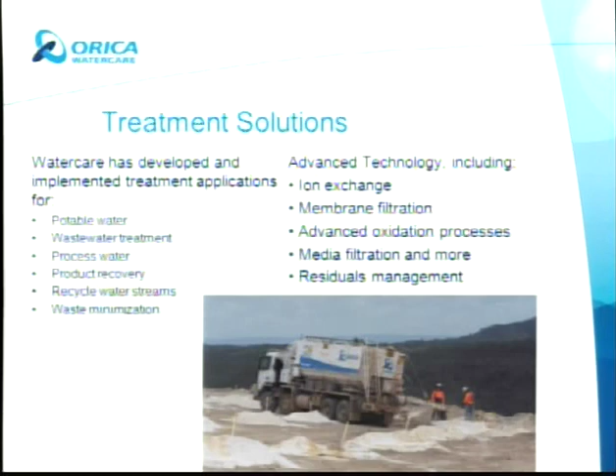We come from a very large mining background that allows us to treat a different type of water every day. So if it's potable, wastewater, process, product, recycle, or just minimizing waste, we have case studies and expertise in it. We use ion exchange, membranes, advanced oxidation, media filtration, and we have a lot of experience in residuals management. So there's a lot of technologies involved in that.

Today we're going to talk about nitrate. In traditional ion exchange that's been mentioned, you can get multiple contaminants. We have certain technologies with our upflow design that we can blend resins. This allows us to do hardness and organics, hardness and nitrate. Maybe we're doing bromide as well. We can really blend a lot of our different resins together to try and meet multiple challenges at the same time.

We also started as an ion exchange company, which has put us in the same boat as everyone else here, there's a brine waste challenge. So we've softened the waste, we've evaporated, and we've concentrated it with nanofiltration. So there's always another option to just squeeze a little more out of that residual.

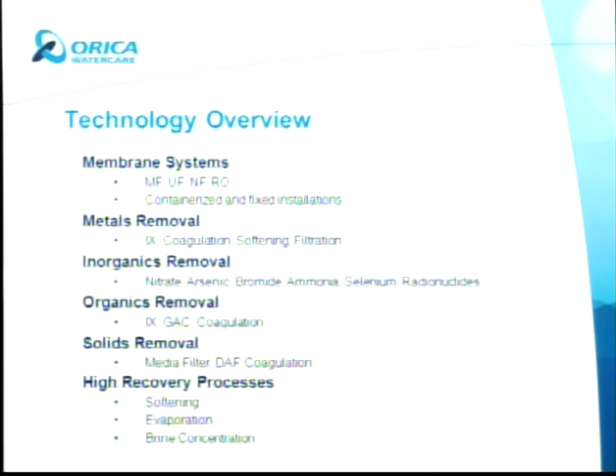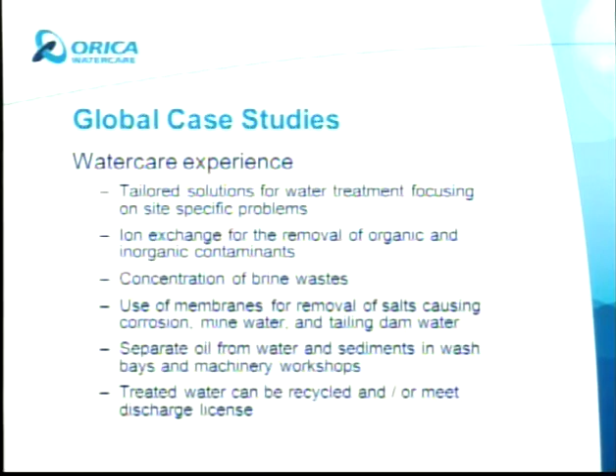We have studies all over the globe, with over 60 installations, and some of the same goals are listed here as we've been going over.

As for ion exchange, we have an advanced ion exchange treatment solution. We remove organic and inorganic contaminants: nitrate, bromide, arsenic, chromium-6, ammonia, lead, hardness, and other metals. We try to minimize our footprint, which helps cut building costs. We're the leaders in process efficiency, and we received two consecutive Green Technology Ribbon Awards at the ACE show from the American Water Works Association.

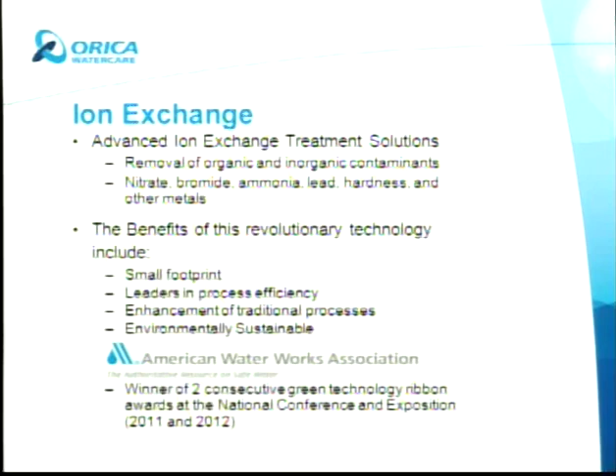Here's a quick slide on nitrate removal using ion exchange. The quaternary amine structure is in the chloride form. You can use other regenerants, but chloride is the cheapest. As the nitrate contacts the bead, the nitrate exchanges with the chloride, and you can reverse the process using a high concentration of chloride or other regenerant.

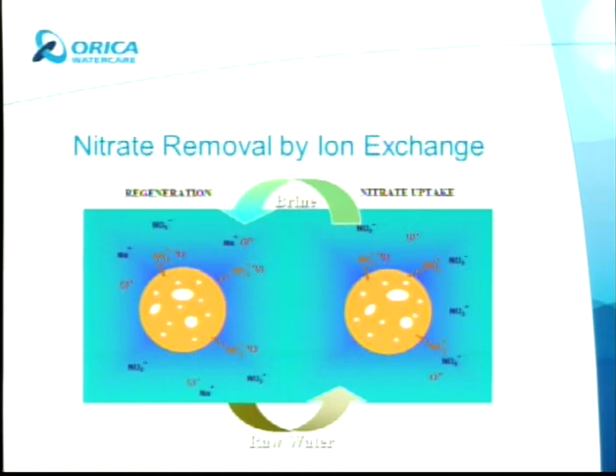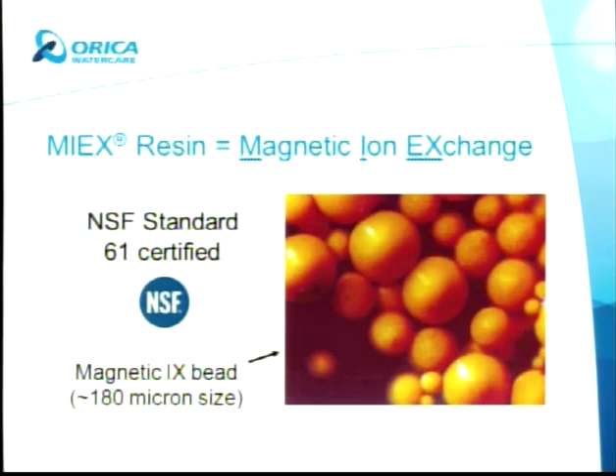Our specific resin is the MIEX resin, which stands for magnetic ion exchange. Our beads are about a fourth or fifth the size of an average conventional bead. This provides more surface area, and usually allows us to do an upflow design in a mixed bed with high surface area and fast kinetics. I'll talk about that more later.

This is the selectivity chart that's been seen in different iterations throughout the day. You can see chromate, organics, and perchlorates are on there, along with arsenate, and nitrate is what we're talking about today.

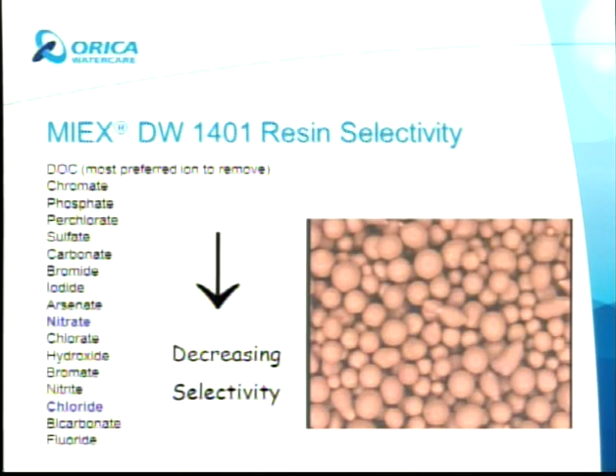The MIEX high rate process is an upflow process. The water comes in the bottom, and there is agitation or a distributor for mixing energy. This keeps the resin in suspension. There's a separation zone, and then the treated water goes out the top of the vessel. This can be pressurized or atmospheric. We have a lot of experience in surface waters where turbidity is a factor.

There's a slipstream regeneration, as Chad mentioned earlier. A fraction of the resin, maybe up to 5%, goes out into a separate process vessel where brine is contacted with the resin. The contaminants come off, and it's back in the chloride form or whatever regenerant you use. Then it's rinsed, and we can have as low as 0.1 to 0.3% outputs in terms of waste.

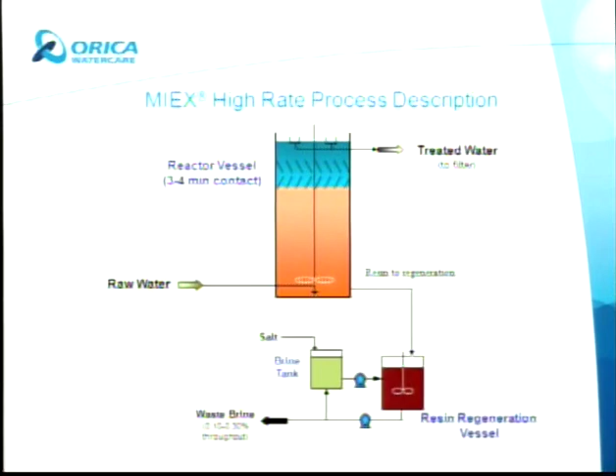The countercurrent MIEX process is one of the solutions I'll show you today. It uses two vessels, both upflow. In the case study, it's two pressurized vessels. It's almost like a lead-lag design, except your lag is in front. So the resin moves from the right side to the left side, where the cleanest resin comes in at the right, and then it's partially exhausted and moved into the vessel on the left.

That allows you to grab the easiest contaminants, such as sulfates and organics, on the partially loaded resin in the first chamber. When you have really clean resin in the second chamber, there's pretty much only nitrates and harder-to-remove anions in there, with the most capacity in the resin. So the idea is you get a higher efficiency of removal of hard-to-get contaminants.

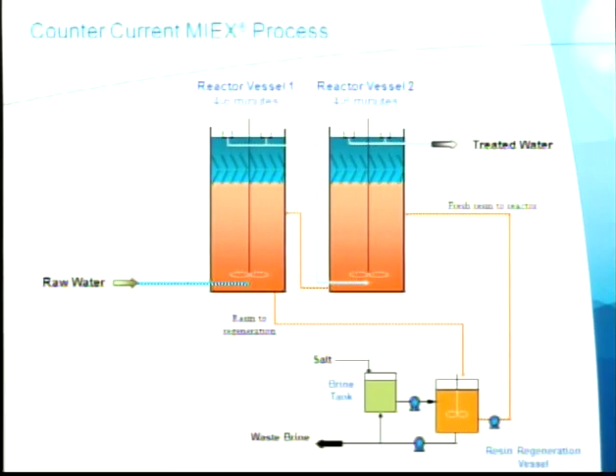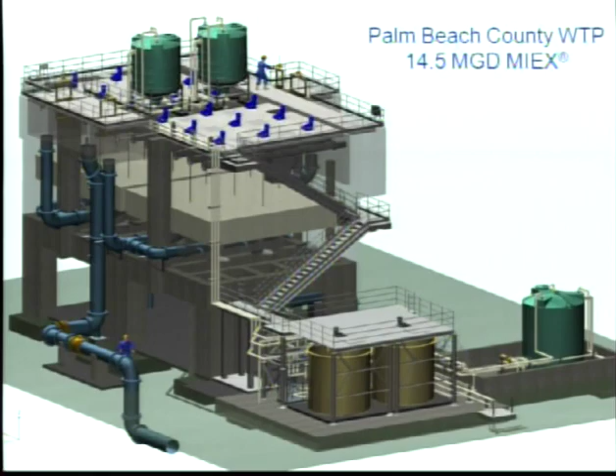Now we'll get to the smaller scale. The advantages of fluidized bed ion exchange are that there's no blending requirements, and you don't need online analyzers. We have a system that works on field instrumentation only, which ends up with no nitrate dumping or any other contaminant dumping, and you can apply it to higher turbidity situations.

The way we control it is by controlling the regeneration slipstream as the nitrate load increases due to seasonal or partial use situations. We can increase the amount of salt and resin processed to increase the capacity on the resin for when the nitrate does start to spike on the raw water.

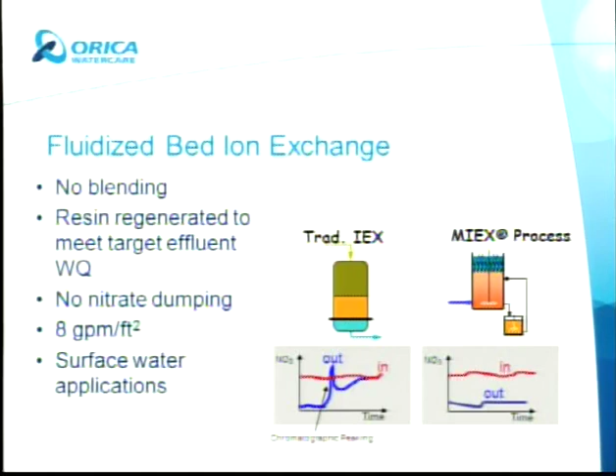This is the first case study: Indian Hills Water District, on the outskirts of Denver in a small rural community with a history of farming. There's about 1,100 people there, and they average 45,000 gallons a day.

This is a surface and groundwater distribution system. The surface water has been in short supply due to droughts in Colorado, and they supplement their water with groundwater. So they're in violation if they use that solely, but they try to blend to get into compliance.

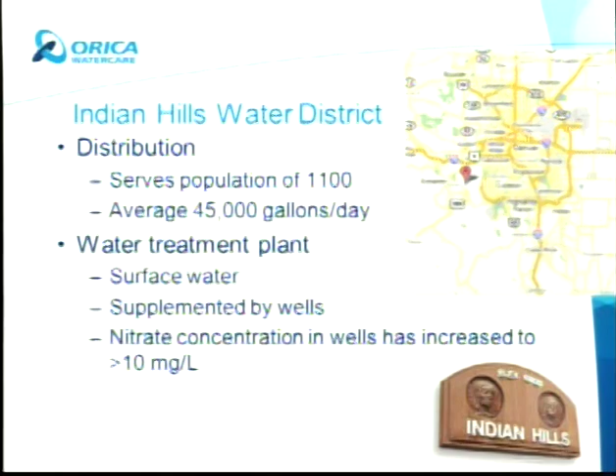This also lines up with our challenge of doing a 50 GPM system and costing it, so keep that in mind as I go through it. Their challenge to us was 50 GPM of flow. This actually has a turndown to about 5 gallons per minute, so you can go 5 to 50 and reduce the nitrates by 50%.

This does not have a wastewater treatment facility. All waste is tanked off, but as you can see, it's relatively close to Denver, so it's easy to find a place to put it in a wastewater plant. So we came in with our countercurrent upflow design.

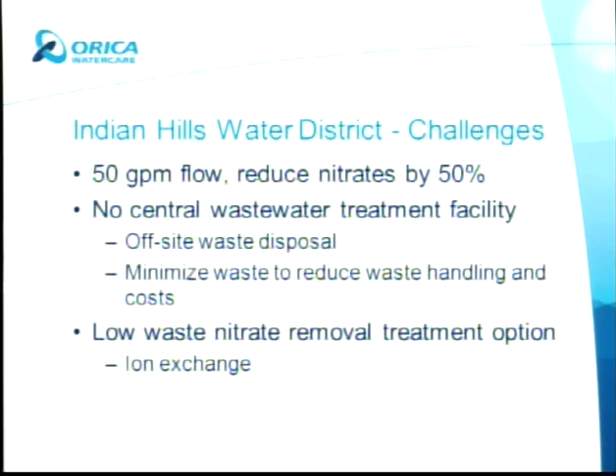The treated water quality: the raw influent average is 12 to 16, about 14, which is about 60 ppm as nitrate, and then the treated average is 5.4, closer to about 25 as nitrate. We also have other anions, the DOC, that's a potential for disinfection byproduct issues with your chlorinated fractions of disinfection byproducts, the chloroform and THMs, particularly in that case.

We do remove sulfate, and this is a relatively high hardness water, which our resin is pretty resilient against scaling, so we don't have to soften the brine, which adds to the efficiency.

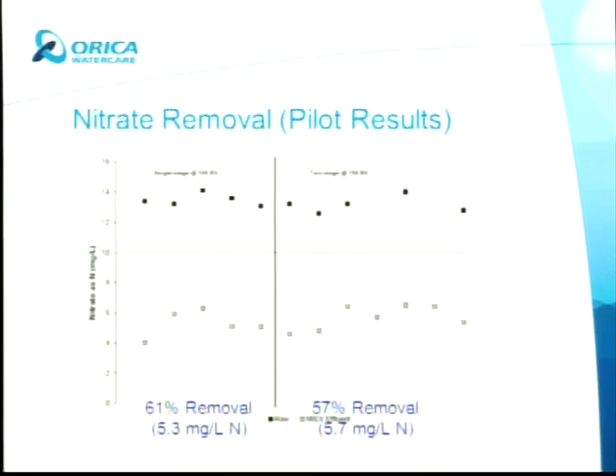We also tried to demonstrate that if we spiked the water and put the nitrate as a nitrogen concentration up to 25, we were able to increase the regen rate and keep the controlled effluent in their target, about 5 to 6 on average there.

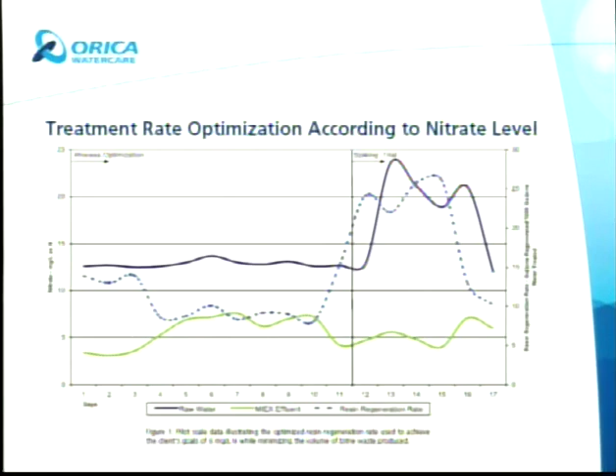The system has a minimal footprint. The client is looking to put in an online nitrate analyzer just for monitoring purposes. The system runs on a field colorimeter. It's a Hach test and tube kit, and the operators test it once a day.

It's two guys: one guy's the fireman, the other one is the wastewater distribution and drinking water guy. There's a 2,000 gallon storage tank, and we're using about 3,000 pounds per million gallons output.

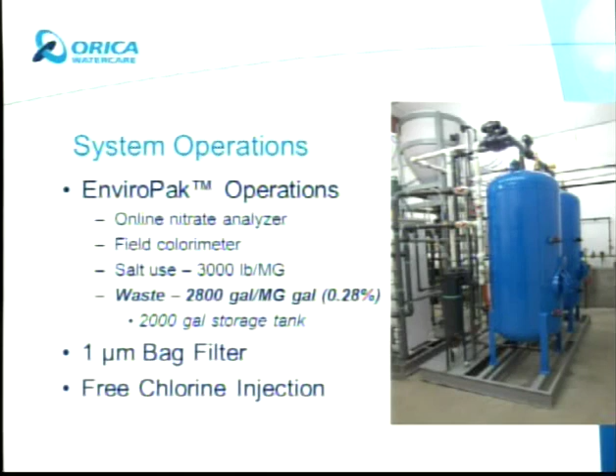There's no large salt handling. This is a mountainous area, so they use bags of salt, and the system was designed for that. We also have 2,800 gallons per million gallons of waste, which puts us at 0.28%. To finish off the system, there's a 1 micron bag filter and then free chlorine.

This cost about $150,000. This was in 2008, I believe. The resin cost, as an ongoing basis, you probably have to replace it every 3 to 5 years. Salt's relatively cheap in the area, so $100 a ton.

And then there's minimal power, about 2 to 3 kilowatt hours, probably just to keep the lights on and keep the PLC going. This is a basic system: painted carbon steel vessels, FRP, HDPE process tanks, no online instrumentation, and 100% redundancy.

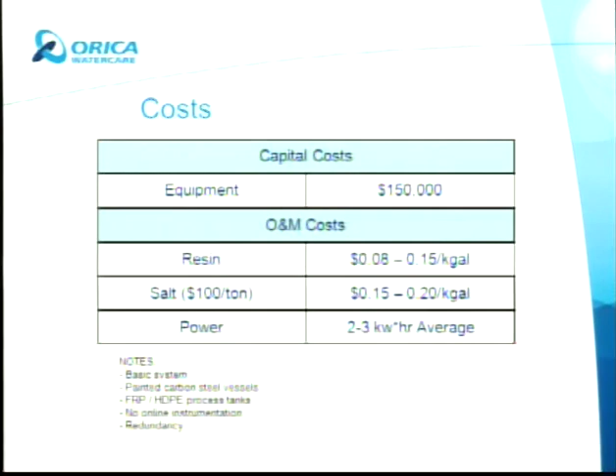So to keep that reliable system, we have a PLC. We had to do 100% redundancy for the state. It can run on one contactor or both to get extra nitrate removal, and then there's 2 regeneration tanks.

Our second case study is the County of Brant in Ontario, halfway between Buffalo and Toronto. This was a bid that we replied to, about a 792 GPM system in total. Associated Engineering was the lead, and it was a groundwater system, and they spec'd nitrate-specific resin with automatic blending, including Nitratax Hach analyzers. They do have sewer there.

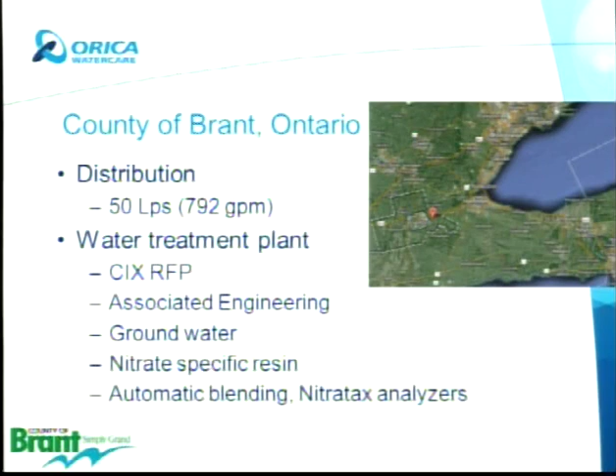The 50 liter per second distribution was set up with 3 20-liter-per-second contactors and a 10 liter per second bypass that could go up to 50 liters per second.

They had a requirement of 24 hours before a vessel would regenerate, and they also gave us the 20 mg/L nitrate loading for the capacity design. We had to blend to an effluent nitrate of 3 as N, or close to 15 as nitrate, and then we could not exceed 3.5 as N.

We did have a process warranty on there for a year, and we also had a warranty where if it did alarm, we'd have to show up. So we haven't shown up yet.

We went in with an alternate bid of the split flow countercurrent regeneration design. I'll go over that in a minute here.

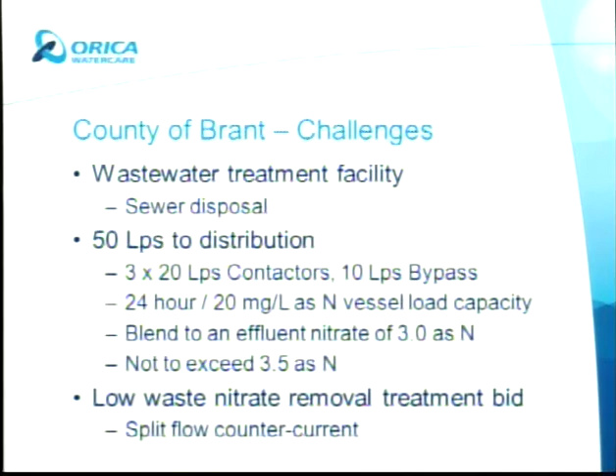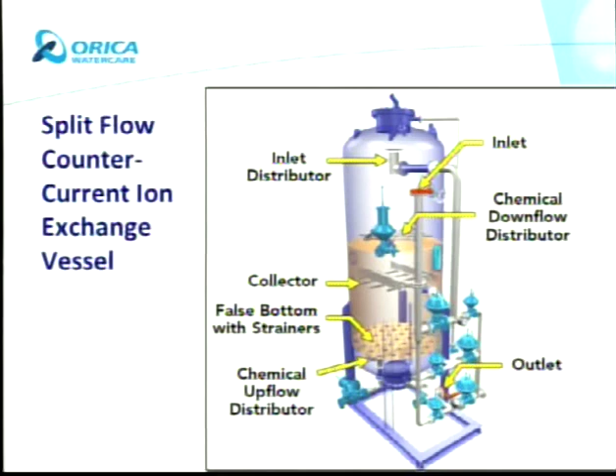So it's still a top-down conventional ion exchange system, fixed bed. You go in the top, come out the bottom, and as we alluded to earlier, the nitrate really loads on the top. So the way this is done is we reuse the brine and regenerate the top third of the media. You can go through multiple cycles before you have to regenerate the entire bed. That allows for waste and salt savings.

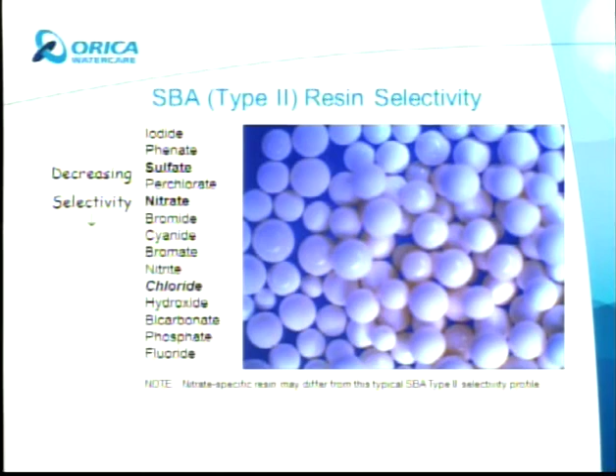A strong base anion type 2 resin selectivity with nitrate specifics kind of rotates the selectivity chart a little bit, but it pushes nitrate and sulfate a little closer together.

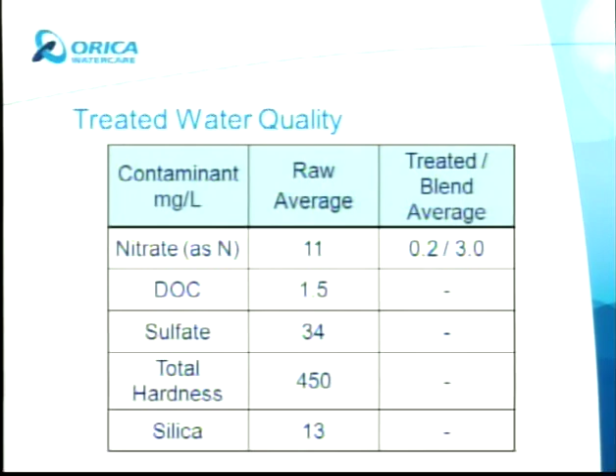We don't have a lot of water quality data on this, but the nitrate is continuously monitored. It comes in at 11, and out of the vessel it's 0.2, and with the blend it's 3. There's a little bit of DOC and sulfate, and the hardness and silica is very high, almost in the fouling range. So we've been able to not have any issues on that. And then there is softening on the brine preparation.

So this system has 5 online HACH Nitratax analyzers. That adds a lot of cost. Each vessel has its own analyzer, the bypass has an analyzer, and the blended stream has an analyzer.

We're able to get the salt use down to 900 pounds per million gallons, and the waste to 3,200 gallons per million gallons, 0.32%, using pretty much conventional ion exchange.

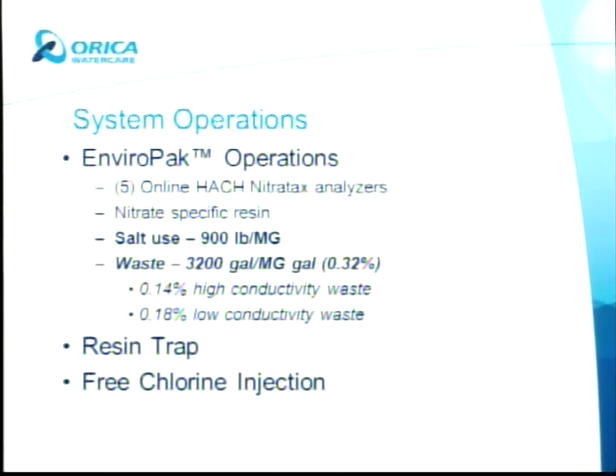Of that breakdown of the waste, 0.14% is high conductivity, where the majority of the nitrate is. And then 0.18% is the low conductivity waste, your backwash water and fast rinse. There's a resin trap and then free chlorine to complete the system.

This one came in high just because of all the site requirements. We had to use specialized valving, specialized instrumentation, nitrate-specific resin when it didn't really call for it. However, you did get some operational benefits on that.

We had to do stainless steel face piping, and it was in a remote area, so your salt price is well over 100 per ton, as it is in Colorado. It's 225 a ton. We estimate that the resin will last 7 to 15 years.

The resin is probably twice as expensive as conventional strong base anion resin. The nitrate-specific doubles the price. It's just not used in large enough volumes for the economies of scale.

And then almost no power is used for our portion of the system. The well power is probably the majority of the power for the system. So this is pretty much just keeping the lights on and running a 2 horsepower pump for 30 minutes once a day.

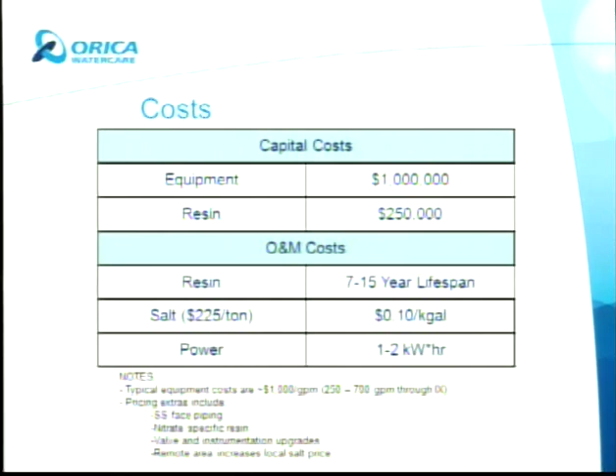We did have a little reliability issue. This is a 3 by 50% system, essentially 2 vessels on and 1 in regeneration or standby. The automatic blending is achieved through the nitrate PID loops.

This does have remote monitoring. We can go on our laptops or our iPhones and control the system, and it's been very helpful for the first few months as you're trying to train operators and get them accustomed to a new system besides just chlorine. You can walk them through it.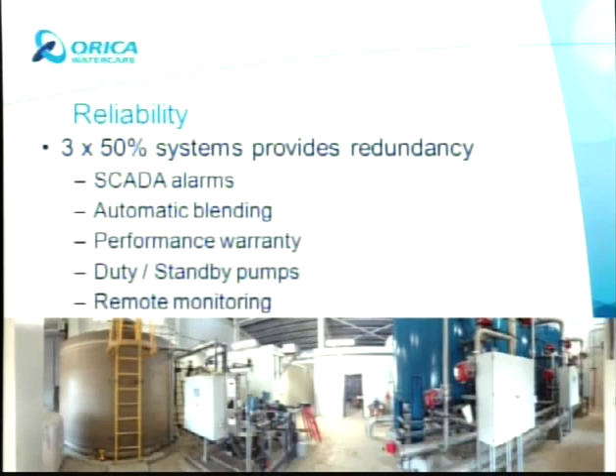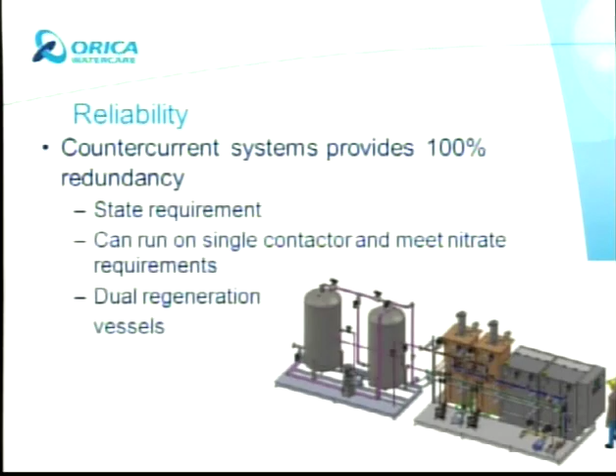On the other system, to keep a fluidized bed we have a recirculation pump that takes the effluent and puts it back through the bottom to maintain resin suspension. For a 50 GPM system, that can probably be handled by a 1 to 2 horsepower pump. Depending on influent flow—if we have full flow we don't need the pump, if we have zero flow we need it at full speed—so you're using a percentage of that. That's your major horsepower draw on a fluidized system, probably averaging half the percentage, so a 2 horsepower pump averages about 1 horsepower. In this case it's a 5 horsepower pump since it handles both vessels, so you'd add 2.5 horsepower plus about 1 kilowatt hour on average for controls.

Any other questions? Any on the web? Nope. I thank you. Thanks.

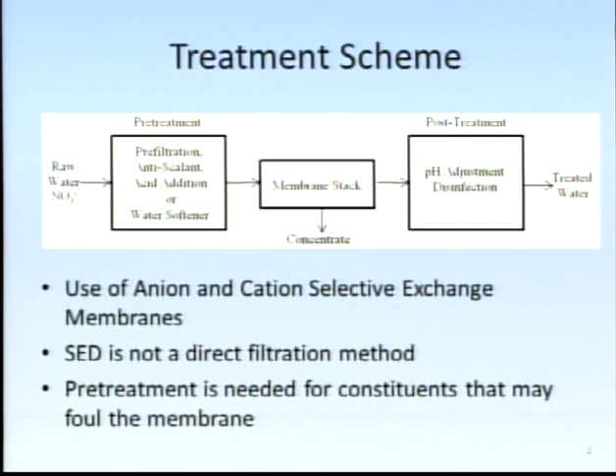Here's a basic schematic of what electrodialysis looks like, for the membrane rack. These pictures are available in the UC Davis technology report. Here in the middle is the concentrated stream, where the reject water will go, and here is the raw water just passing through. On the two ends of these stacked membranes, there's a cathode and anode on the left and right side of the picture.

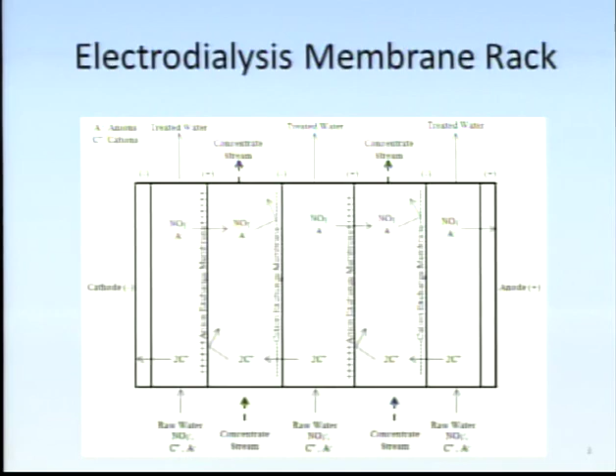I'm going to switch over to the cartoon, which explains this process really well. The blue channel, where you have the little ping pong balls going through, that's your raw water stream. You have all your contaminants of different kinds - nitrate, calcium, chloride, sodium, and so on. The membrane here is nitrate selective. So by turning on the technology...

You see that the ions, positive and negative, start getting attracted to the side of the membranes. The nitrate, which is the gray ball, majority of them will get into the reject channel, whereas the majority of the other ions just pass right through in the main channel. So this is one way for us to concentrate nitrate and have a reject stream that is mostly nitrate and does not have very high TDS, because the majority of the water just passes right through.

The potential treatment benefits for this: the treatment objective is to maximize water recovery with the minimum amount of energy and chemical usage, as with any technology we're trying to implement. In this case, there's potential because you have lower pumping cost compared to reverse osmosis.

That's a benefit. The selective electrodialysis process just removes the nitrate, so the TDS remains in the treated water. And since the TDS is not concentrated, the TDS concentration in the concentrate stream is so much lower, there's potential for you to use that concentrated stream somehow. One possible way is the concentrate can potentially be used for irrigation without the salinity that adversely affects plant growth that you have with RO. So this is a good potential for SED.

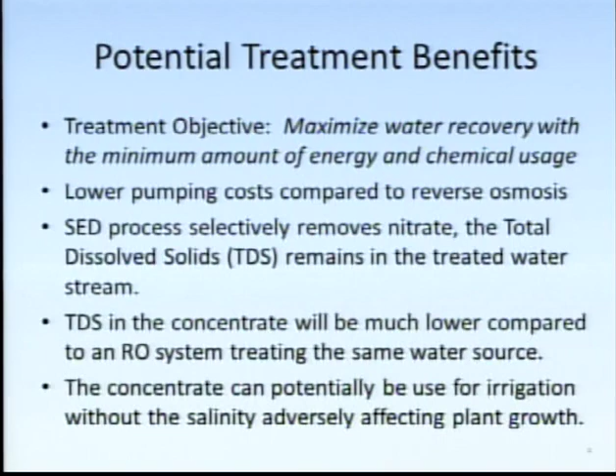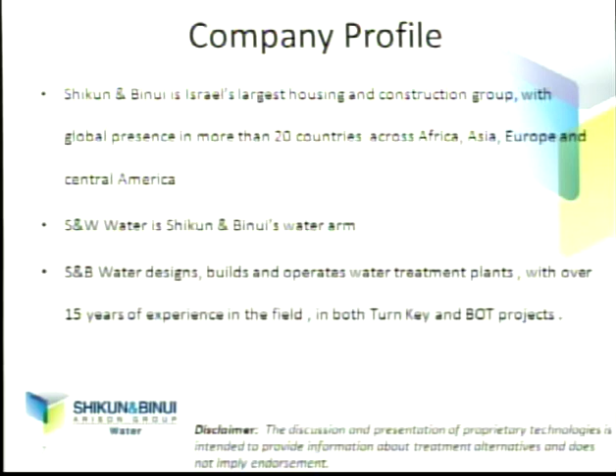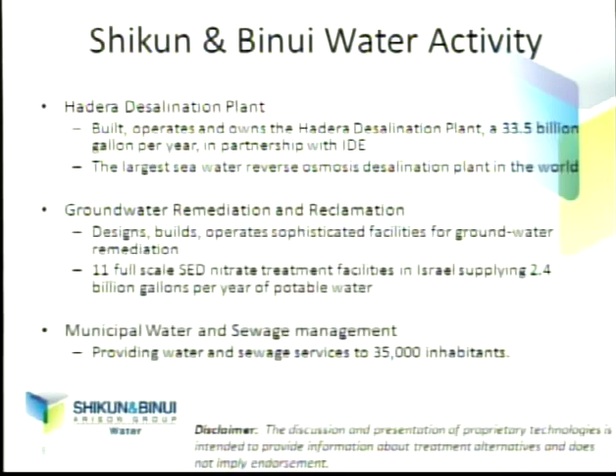The company, the product is Shikun and Binui. They are a company based in Israel. They have these products, a couple of them in use in Israel already, where they have a big nitrate problem as well. Their company is one of Israel's largest housing engineering construction groups. S&B Water is their water arm, and they build and design water plants in Israel. They have a couple plants - the Hadera desalination plant is one of them. They have a groundwater remediation and reclamation plant, and they also have municipal water and sewage services.

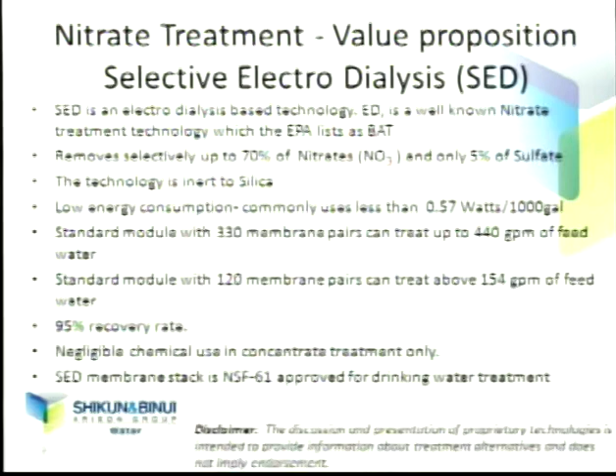So same as the diagram shown earlier, the cation exchange and selective anion exchange membranes are arranged alternately between the electrode cells. So you have the main channels, and then you have the reject channels in between.

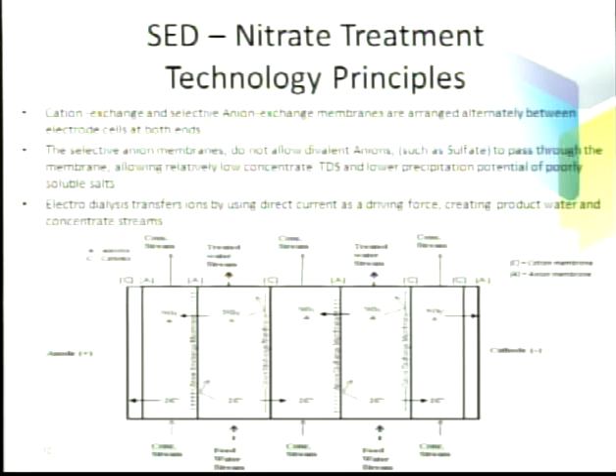The selective anion membranes do not allow divalent anions, such as sulfate, to pass through the membrane, allowing relatively low concentrate TDS and low precipitation potential of poorly soluble salts. The electrodialysis transfers ions by using direct current as driving force, creating product water and concentrate streams.

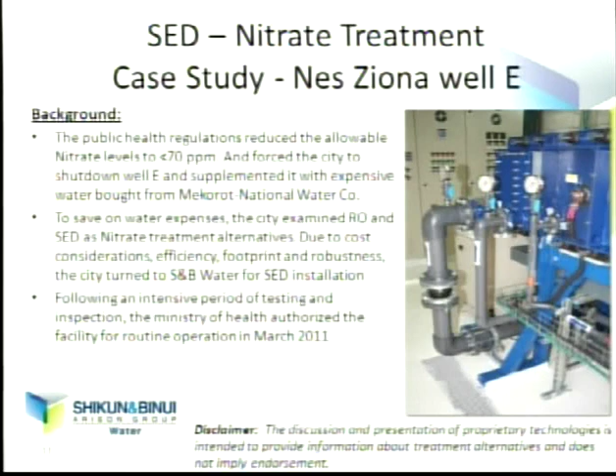Here's some case studies that they have provided us. The SED nitrate treatment plant at the Nes Ziona well E. The drinking water standard for nitrate in Israel is 70 ppm as nitrate, so it's much higher than ours. To save the water expenses, the city examined RO and SED as the nitrate treatment alternatives, and for their cost they found SED to be cheaper. So they did quite a bit of study, and then they actually installed the treatment plant, and it came into operation in 2011. Here are some examples and results of what they can do.

As you can see, the raw water coming in from this well is around 90, and then the effluent they can consistently meet around 40 to 50, but that's based on a standard of 70.

They have been working with us here in the States because they're proposing to try to enter our market, and they're working with one of the larger water utilities in California. They have done some baseline pilot studies in a laboratory environment, and they're able to mimic the same performance here so that we are able to do similar work when they actually try with real California water. They actually shipped barrels of water from Israel to here to demonstrate that the pilot unit, when they do the bench scale, mimics full-scale operation.

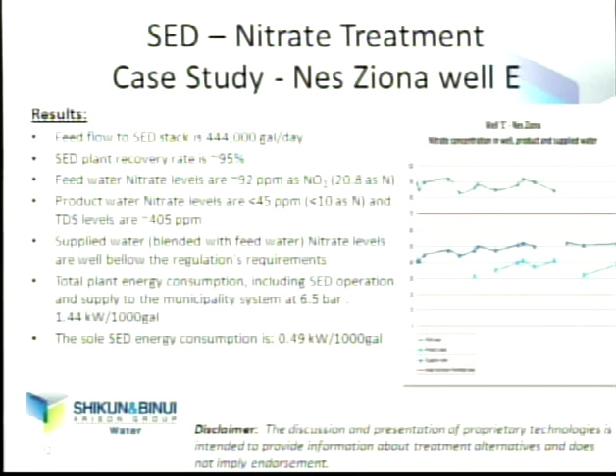And that's the tricky part about using the SED process. You really cannot pilot it. You either have to buy the whole unit and start running it, and the next best thing to piloting is running a laboratory-based experiment.

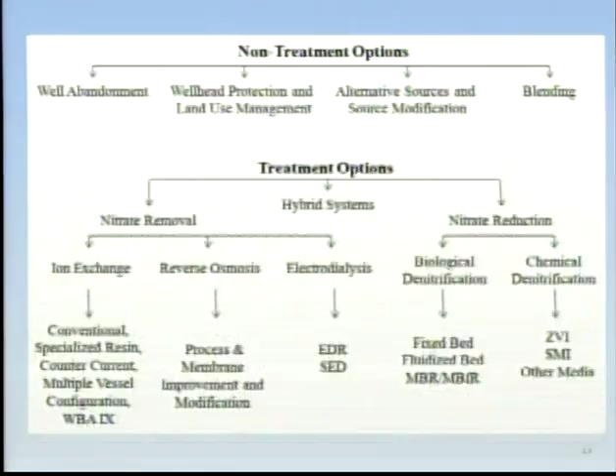But anyway, back to our main diagram for the family tree of treatment technology after all of this. As you can see, we have lots of treatment options available. I think it is evident from all our discussion that treatment residual handling is one of the biggest problems with nitrate treatment. There are a lot of technologies that's efficient and effective in reducing it, and we have gone through in the last 2 days different methods of dealing with residual. Probably our solution is what's in the middle. We need a lot of hybrid systems, different ways of solving the nitrate problem.

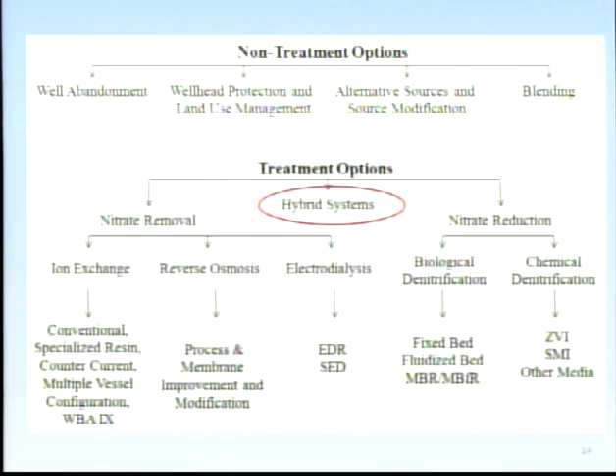And that's it for my presentation. Thank you.

Oh, there's a question at the back of the room. Oh, there's a few questions. Cool.